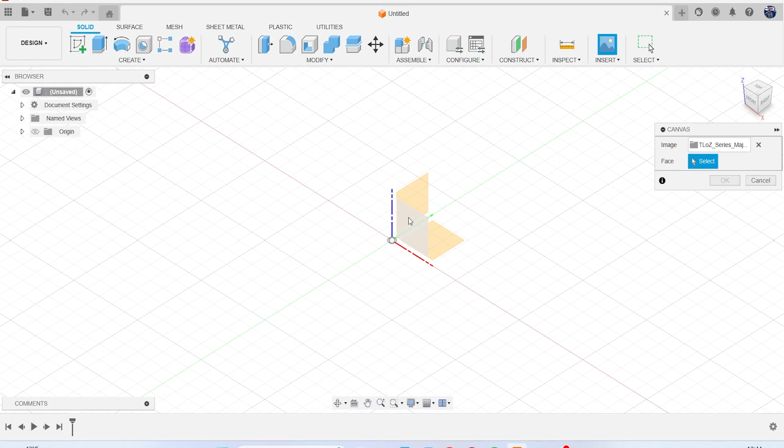I'm going to insert a canvas, go to Insert and Canvas, then bring in my reference image from my desktop folder onto this front plane. I'll make it quite a bit bigger, like 10 times bigger, bring it up, make sure it's centered, and hit OK.

Let's start a sketch and hit L for line, coming from the center straight up. We're going to model half of it and then mirror it across. Then let's go to Arc, 3-point arc. We want to try and keep this as smooth a transition as we can, otherwise it'll look a bit weird when we come to texturing it later.

Let's hit escape to get rid of that, and turn the canvas off for a second. We've got a little bit of drawing there, so we use fillet to smooth that round, and same here, it's a little bit pointy, so we'll fillet it. The rest of it here is pretty smooth, so we won't do a fillet there, we don't need it. Okay, so we've got the general layout.

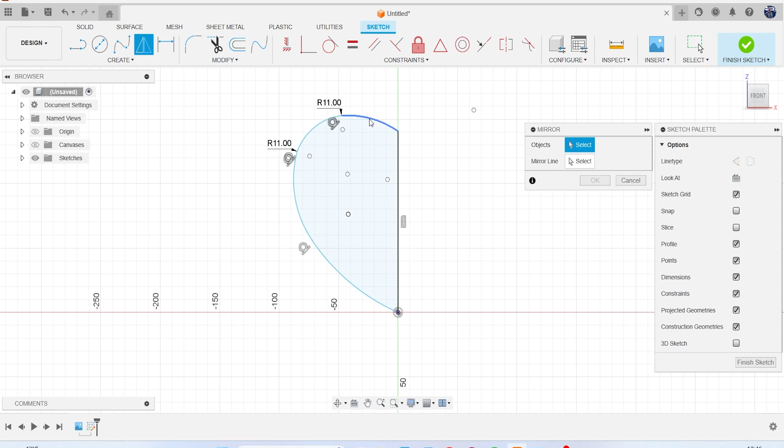Let's mirror that across. To create a mirror, I'm going to double click to select all of those, then deselect that line and select that as the mirror line. So now we've got our general shape of our mask. I'm going to hit finish sketch.

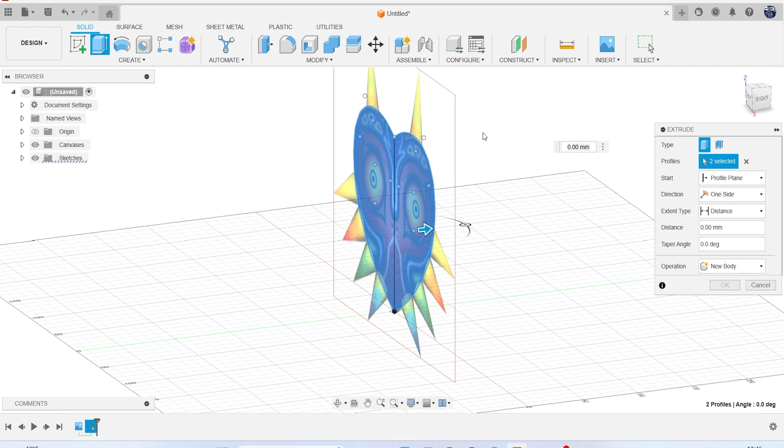You can hit E to extrude, or go to Create and Extrude, keyboard shortcut E. Grab both sides of those. For now I don't know how big it's going to be, but we'll find out later, so I'm just going to drag it out a little bit first, like that.

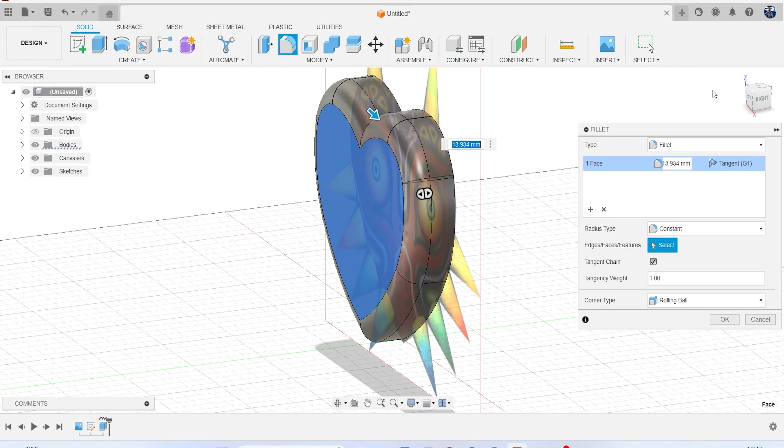So what we want to do is round it off so it's more mask-like. I'm going to go to fillet, modify fillet, or keyboard shortcut F. I'll hit F on my keyboard, grab that surface and just drag it in something like that, then hit OK. Then what we're going to do is flip it over to the side.

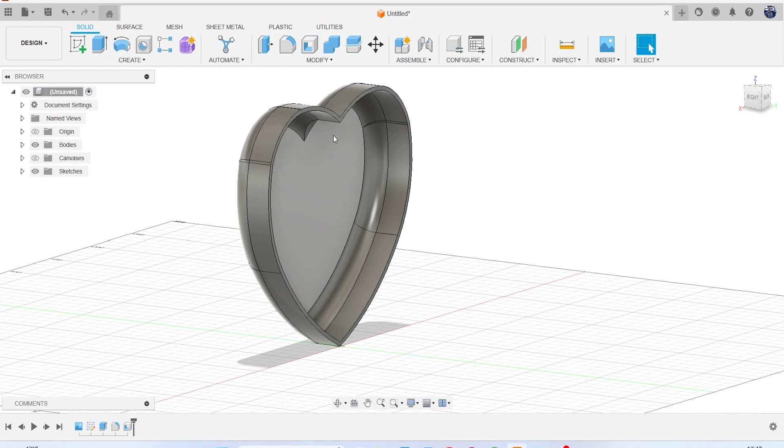Then let's hit shell and drag that in a little bit as well, something like that. We'll alter how thick we make this later when we do the spikes, but for now we're just going to do the details on the actual surface itself, so basically these sort of details.

Again, what we're going to do is mirror it across these. If I turn off the body, see what's going on. So these details here we can all model inside of Fusion, but the stuff that's hand painted, we're actually going to do that in a texturing software afterwards anyway.

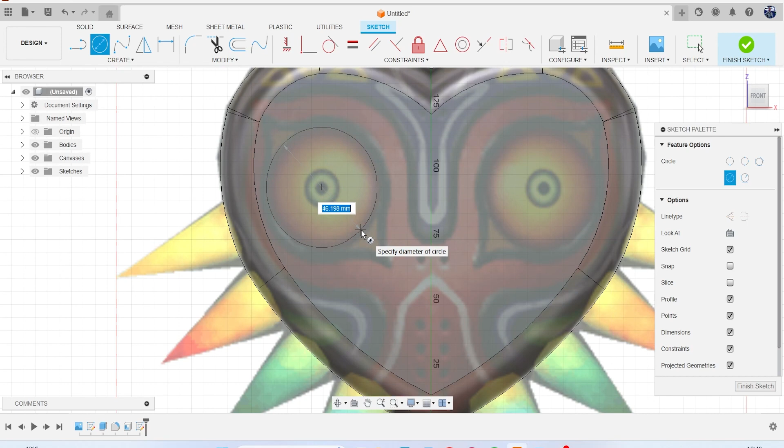So let's create a sketch. First thing, let's create an eye. I'll go to circle, create circle, and I'm going to do center circle, so it'll be a C. I'm going to come in the middle, drag it out like that, and then do another one.

About there. Then I'm going to create arc, 3-point arc. Let's go to the top of there, drag that in, same on this side, like that. Then I'm going to hit T on my keyboard for trim, or it's under Modify and Trim, to cut off those bits, and now I want to fillet to make that a smoother transition again. Let's grab those and enter.

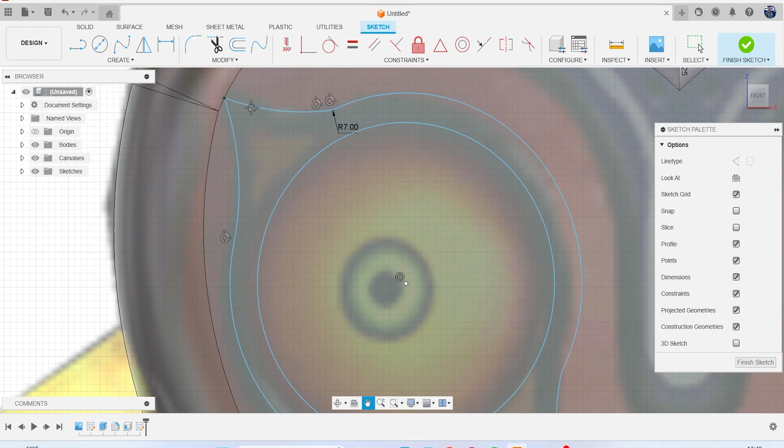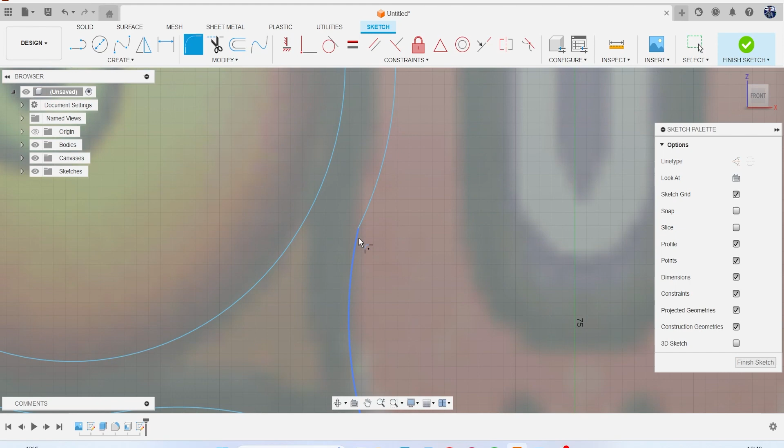This side, yeah, if it's a smooth transition, a lot of the time Fusion will say there's no need, so we're not going to. This one up here, I got 'this fillet can't be created because there was no need.' Whereas this one, it's kind of pointy, so I click on those two. A lot of the time Fusion will try to tell you what it thinks the best case is. You can always alter that if you want, but it normally gives you what it thinks the best one will be.

Okay, so we've got that. Let's finish sketch. So let's grab this and we'll create our eye. I'm going to take this and drag it up.

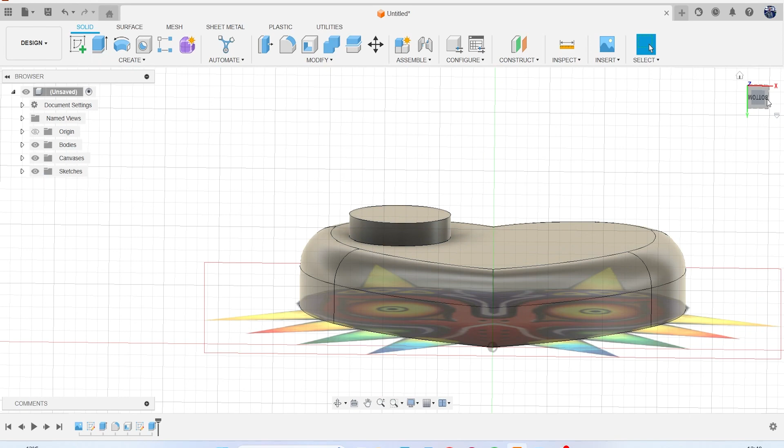I'm going to change this to new body. Then what we're going to do, first of all, is give us a quick save. Let's do that, give it a name, so it's safe.

I'm going to fillet. Again, fillet up here, modify, fillet, or keyboard shortcut F. Grab that surface, let's drag that in so it becomes round like that.

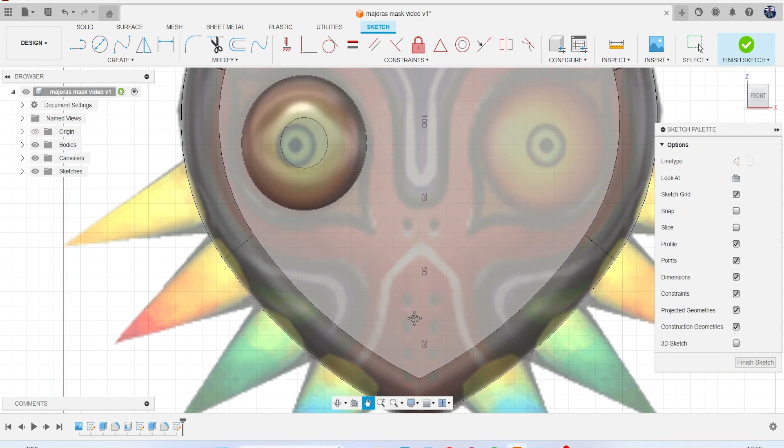Then let's create a sketch. Let's do offset, drag that in. And hit E to extrude, grab that surface, drag down.

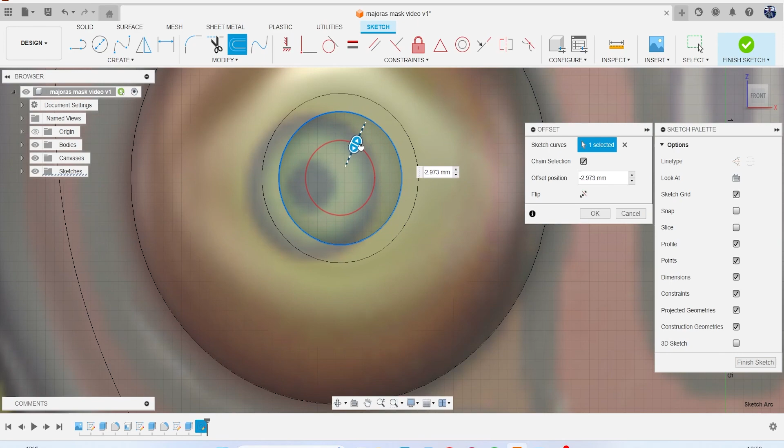Then I'm going to create another sketch. Let's offset that, drag in, and hit E, grab that again, and then we can drag it up again. But I'm not going to drag it up, I'm going to click on this surface here, and I'll bring it up like that. And click join.

And then maybe we'll just do a slight fillet just to round that off a bit, and then we'll do the same. Like that. So we've got our eye.

I'm going to bring back this sketch here. So we want to have this line. So I'm going to create and pipe.

So I'm going to start selecting, and it should select most of it. There we go. I'm going to change this. Oh, in fact, there's one thing I want to do first before I do that as well.

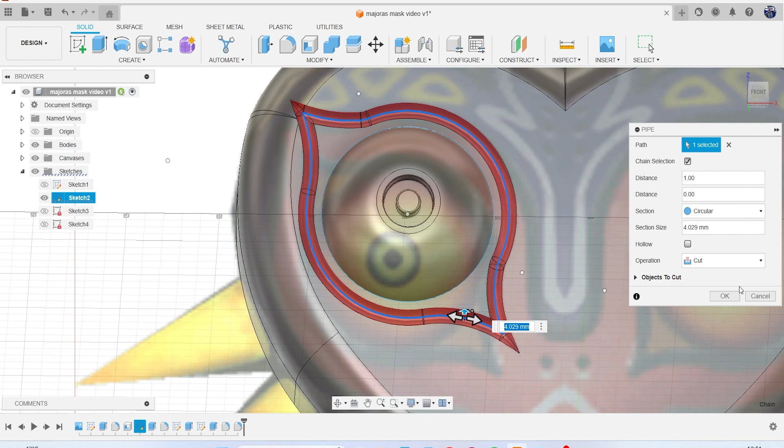So let's go back to this sketch. Let's edit. And we want to fillet those a bit so they're a bit more rounded. Something like that.

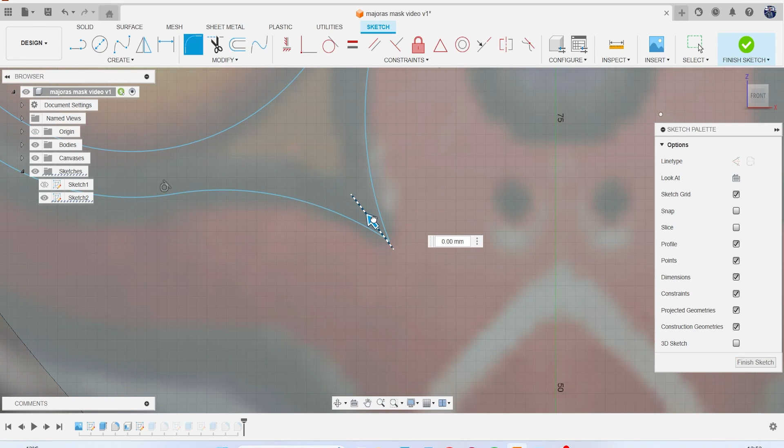Do the same here as well. Let's fillet. Hitting keyboard shortcut F for fillet doesn't work in sketching. So if I was to hit F now, you notice it jumps out of sketching and into solids, which is why you can't use the keyboard shortcut for fillet in sketching, unfortunately.

Okay, now let's go to create and pipe. I'm going to grab all of that. I'm going to change that to new body. And then we're going to bring that smaller.

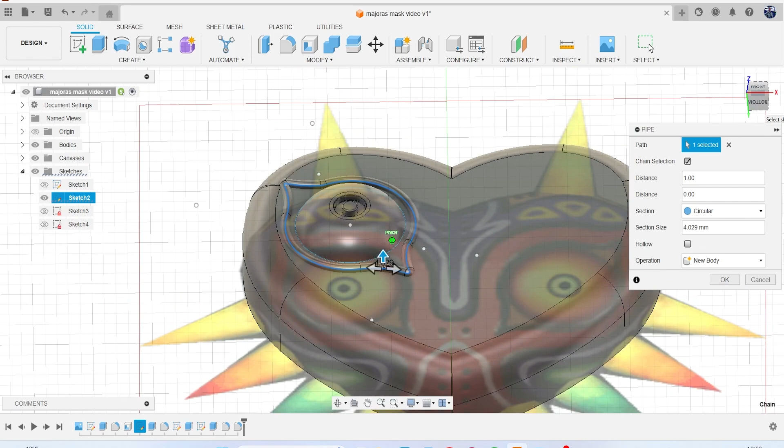Let's try a few different things. Let's try 2. It looks about right, actually. Yeah, okay, we can always change that size later. It's not a big problem.

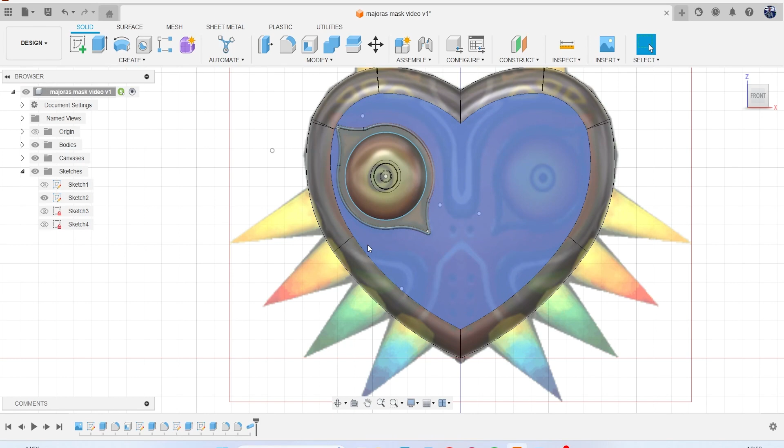So now what we want to do is let's do this big one here. I'm going to turn that sketch off. Let's create a sketch.

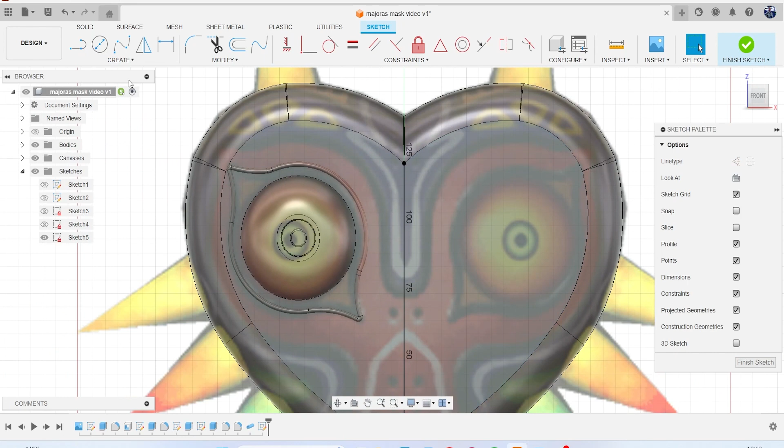And then I'm going to use create an arc, a 3-point arc. In fact, before I do that, let's just do an L for line. I'm going to come straight up the middle. Then I'm going to go back and create my arc.

Just sort of trace over this as much as I can do. Jump between lines, so L for line. And arcs tool.

Turn this body off so we see what's going on a bit better.

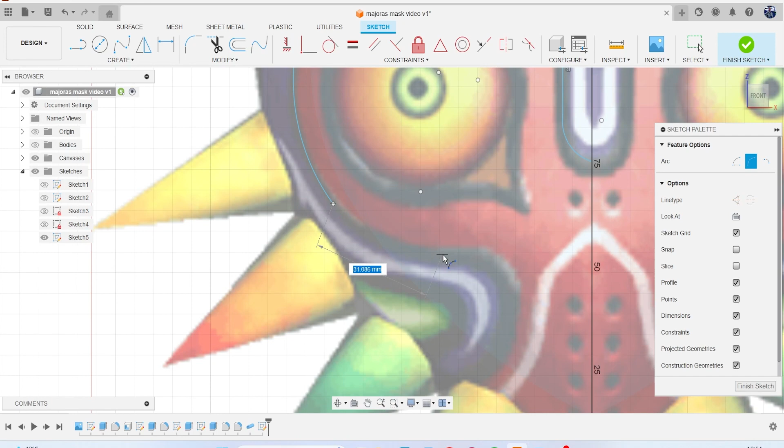Work our way around, nearly done. Again, we will smooth these out in a second, so let's fillet, and hopefully if we click those, it will let us join those together. Enter. And then it's a case of trying to make sure we've got smooth transitions.

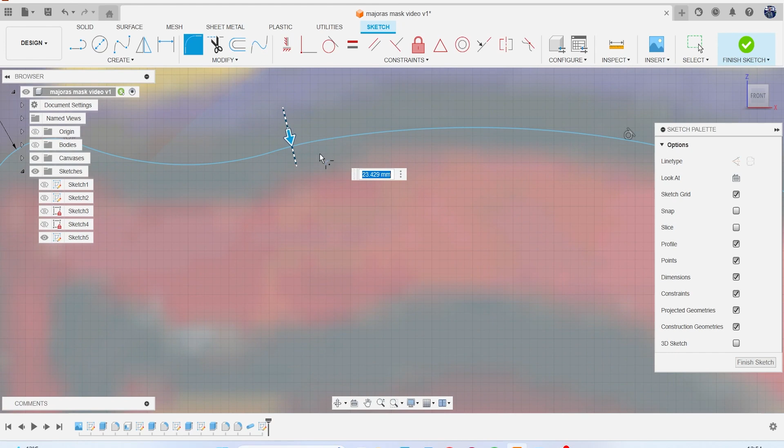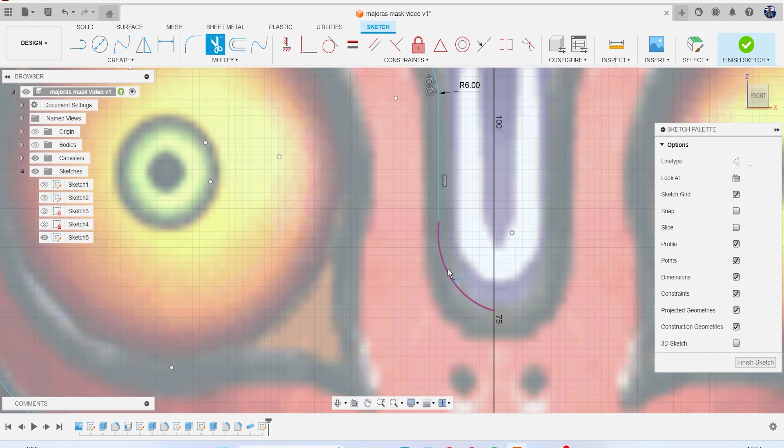We don't want to have one there. But maybe with the numbers, we'll change that in a second. Let's come around here. Here. Oh, I didn't think it was going to do one, but it did. Let's.

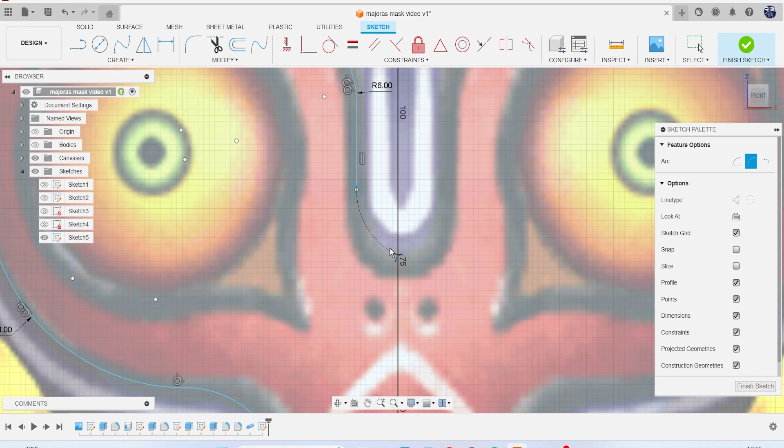Okay. So let's just finish off this one here. Should do, we don't need to fillet there.

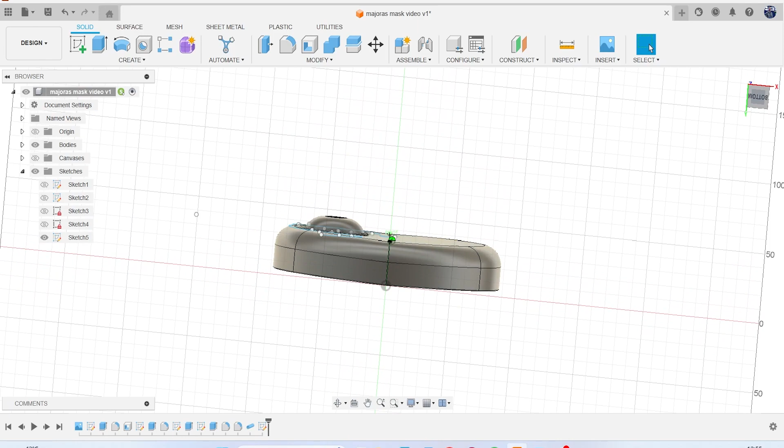Okay. So if I turn body back on and turn the canvases off a second, we want this to be projected onto the surface, but obviously because it's a curved surface, it's not going to be all the way around. So what we can actually do is project it onto those surfaces. So what we're going to do is create another sketch.

So let's create a sketch there, and then what we can do is create, project, and then project to surface. So it says faces, or project, so let's select all these surfaces we want to project it to. And then curves,

double click all those curves there. And then hit OK. You'll see if I turn that sketch off now, that curve has made it all the way across there.

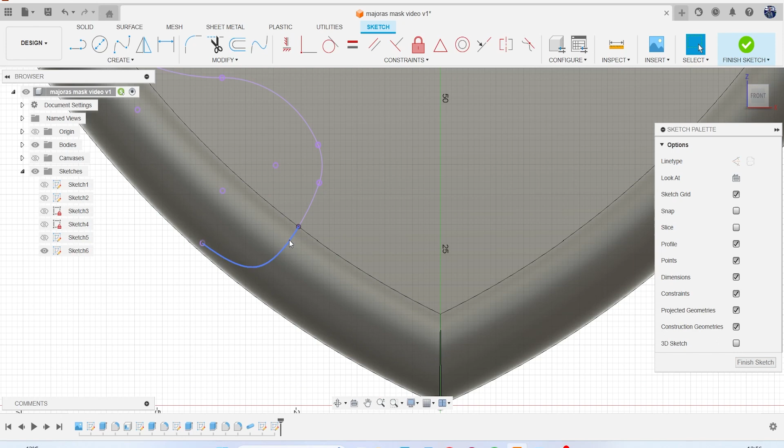Now annoyingly this has gone there, so what we're going to do is I'm going to do it, then I'll split that body along here. But for now, let's just go to create.

In fact, let me just show you. So if I scroll down now, or rotate around, you can see it's actually following the geometry of the shape. So let's go to create, and oh, we need to finish sketch first.

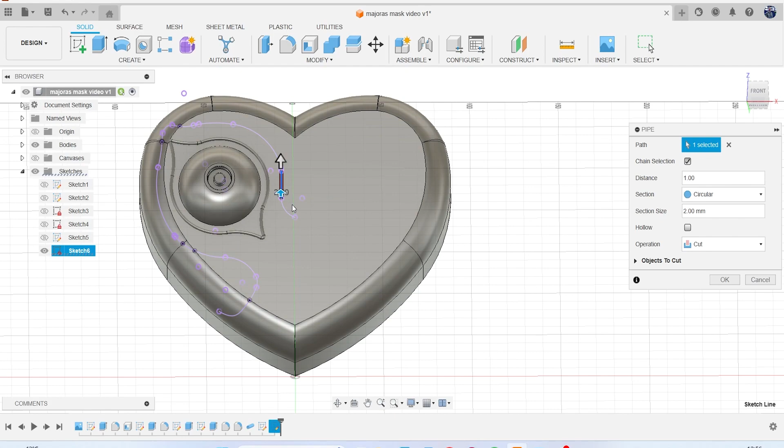Let's finish sketch. Create, pipe, hold down control, work our way around.

I'm going to change this to new body, and it's 2mm like the other one is, but we'll have a look and see how it looks in terms of whether we want to make it thicker or not. Keep working our way around.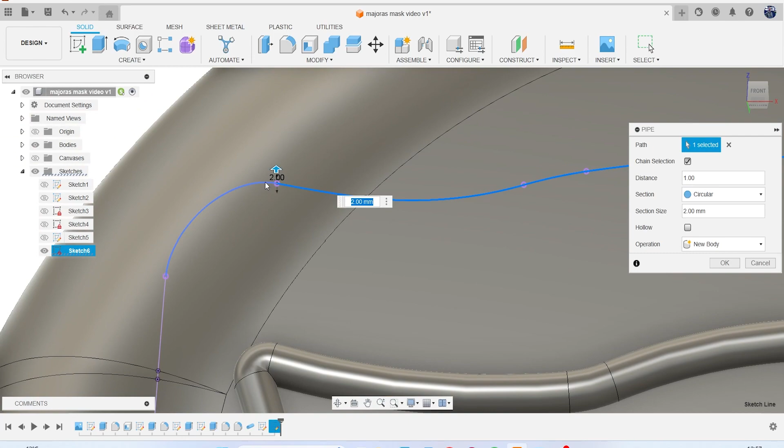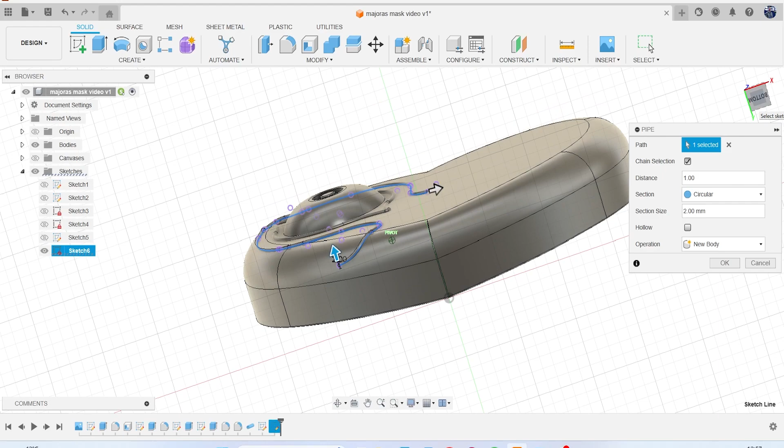Let's have a little look. As I said, we're going to split this one off here and sort of extend it down a bit.

So in fact, one second, let's just go back and edit this sketch here. That's it, L for line. Come straight off there, and then trim that bit off.

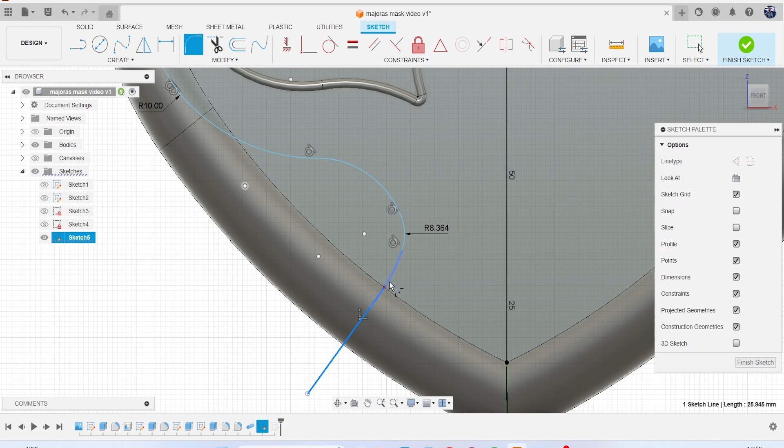Okay, let's now see how that's affected everything. Project to surface. Okay, let's get rid of that.

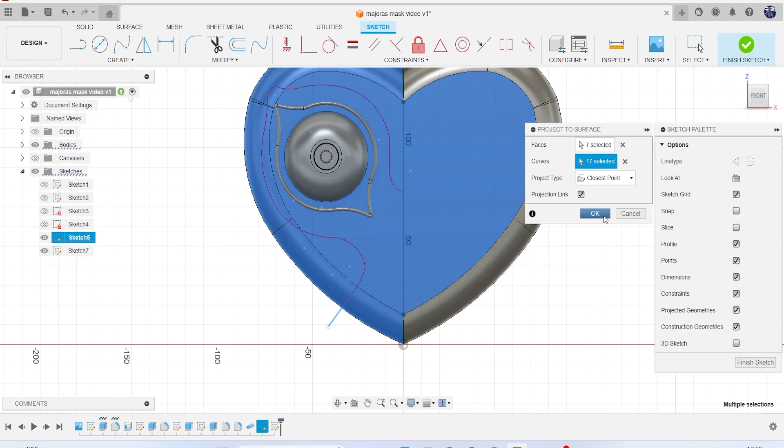Let's do that again. So create a sketch, create and project to surface. Let's then grab these faces. Then let's grab that and hit OK. Turn that off so we can see. There you go, we've got a better result there.

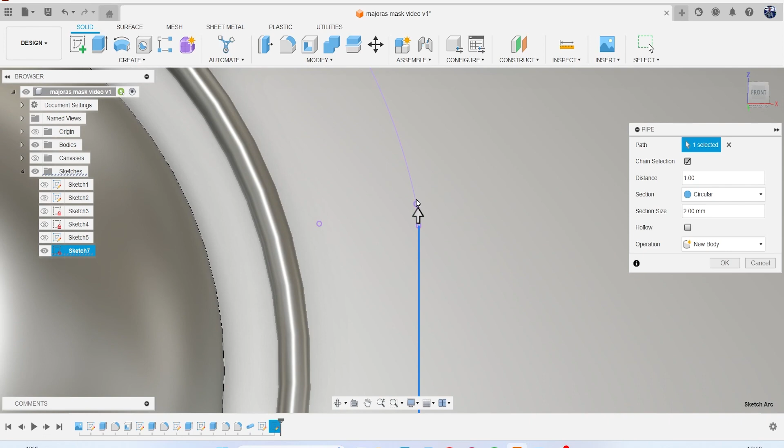Yeah, I'm just going to end where we want it to end. Okay, that's better. Right, now let's go back and do pipe. Change that to new body, and again it's still at 2 for now, which is fine. We'll have a look and see if you want to change that thickness in a little bit.

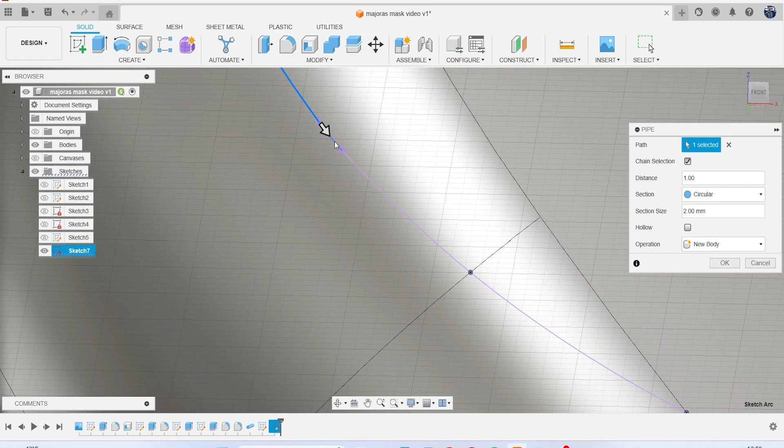So as I'm doing this, I'm holding down control. So if I were to try and click another one now, it wouldn't let me. If I hold down control, grab it, it also won't let me. So if the curve goes there, it won't let me continue if I click on this part. It has to be like one continuous curve basically. So let's just keep going around.

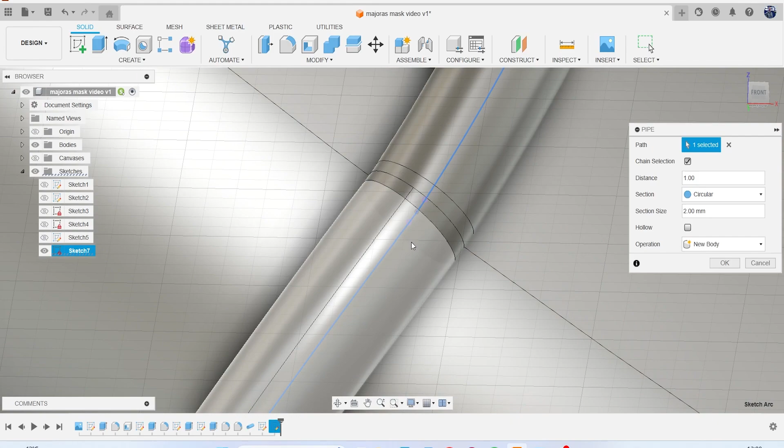There we go. Okay, so I've got that as 2. I kind of feel it needs to be a bit thicker. Let's try 3, 4. I feel like 4 is better. Let's do that.

Yeah, 4 is better. Then let's go and see if we can edit this one. How does it look if we do 4 for that? Okay, there we go.

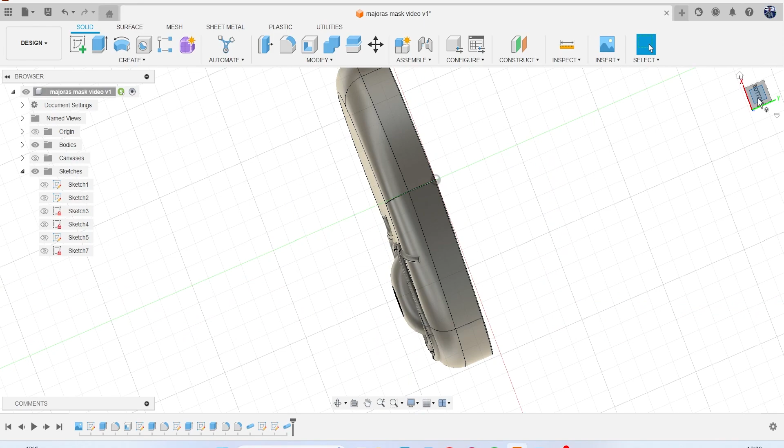In the canvas let's see what we've got going on. We've now got those details. What I'm going to do is let's just fillet around here. So I'm going to go to fillet, grab that and just drag it up just to end it like that.

So now we're going to mirror across. So let's go to the sketch we created there. So we've got this midline here. It's going to go to construct and plane at an angle. Grab that and change it to 90 degrees. So you can see it's here.

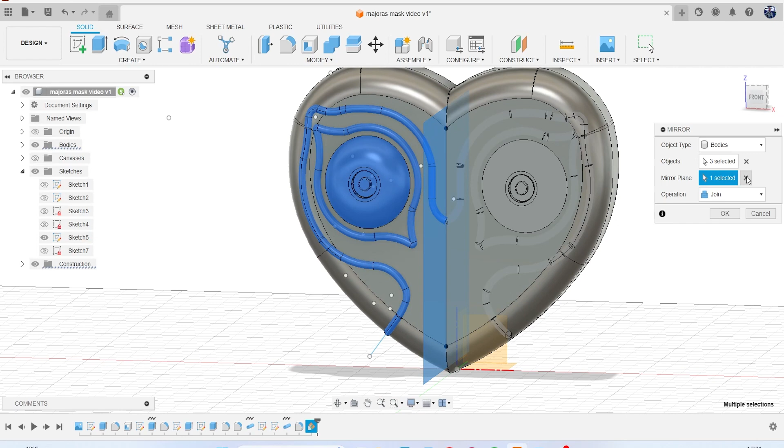Let's go to create mirror, bodies. So I'm going to grab all of these bodies, mirror plane, I'm going to grab this one here. I'm going to leave it as new body first because I'm going to want to join these together in a second. I'm going to hit V for visibility to turn that off.

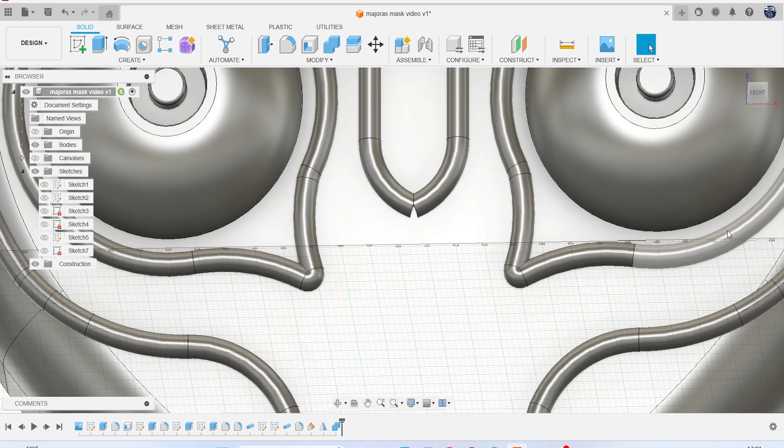You can see it's still following it how we want it to do. Now here we've got a bit of an issue, so what we're going to do is let's combine those two and then let's create loft. Where are you? Loft. Let's loft these two profiles.

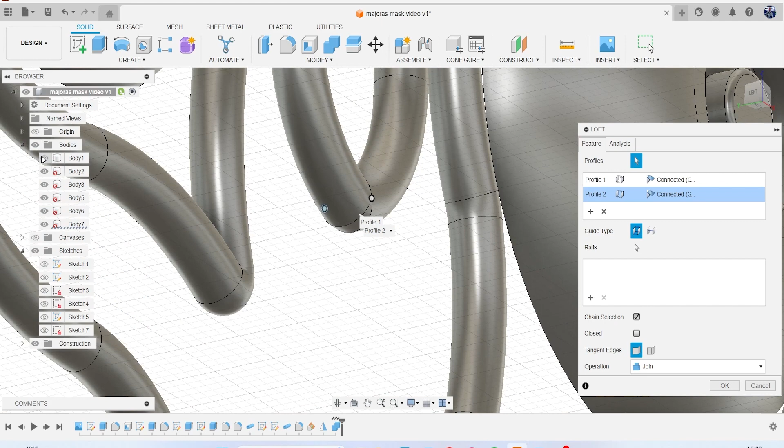Okay, I'm going to turn off that body so they don't join together there. Let's just see how we're looking. Do we maybe need to fillet those, let's see.

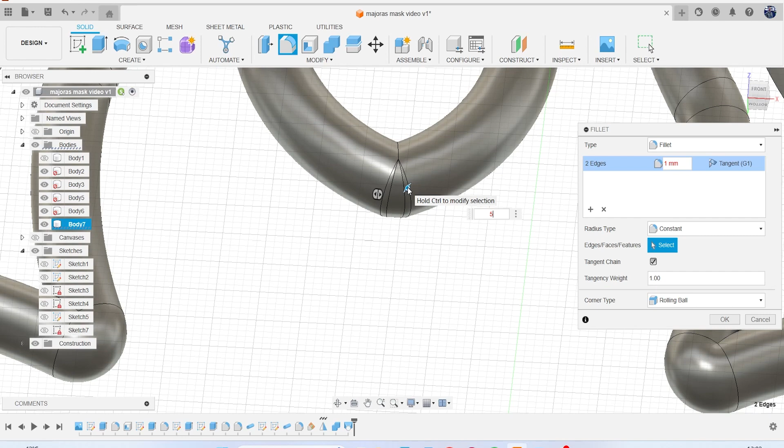See how that's looking. There you go, good. So we've now got most of the modeling side of it done actually, so let's give that a quick little save.

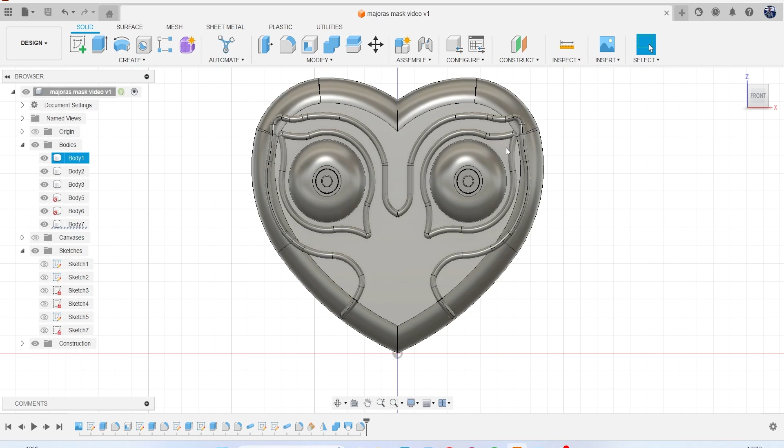Then let's turn on our canvas, so we want to have our spikes. So what we're going to do is go to create and go to cylinder. I'm going to click on this plane here, just to drag it about the same down. I'm trying to match it up down to roughly to here.

And then all I'm going to do for now is let's just drag it so it's taller. And what I can do is hit OK. Take that, right click, move copy.

I'm going to rotate that 90 degrees. OK. Move copy, bring that into position, roughly where I want it. And then I'm just going to grab that, Control C, Control V, bring that one up here for this one.

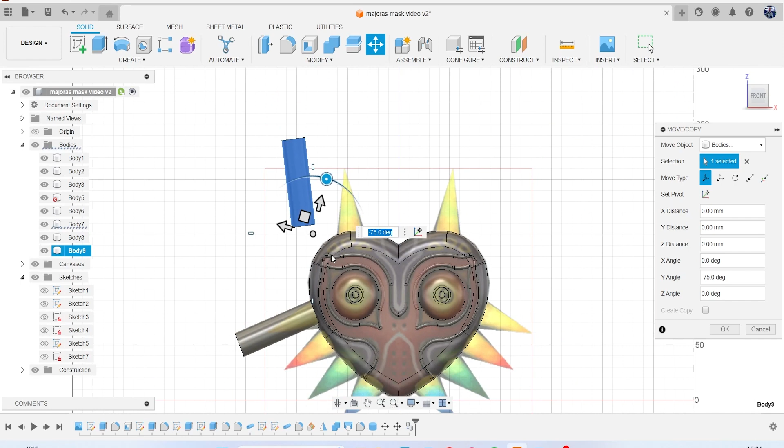Again, we're going to mirror these across, so we're only going to model these 4 and this one up here. So I'm going to leave that there.

Now obviously we want to make it more spike-like, so what we're going to do is go to Modify and Draft. So it says Pull Direction, which is essentially where do you want it to hinge from. So I want it to hinge from this one, faces these. So now if I grab this widget, you see I can make it more or less spiky.

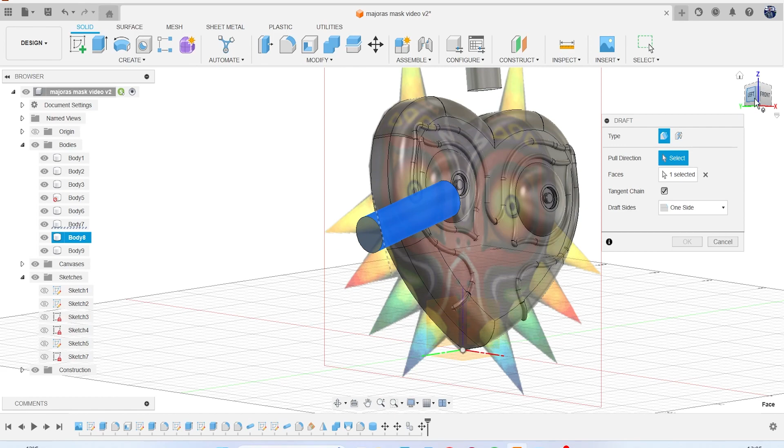So if I had the pull direction as the other bit, essentially it would have inverted spikes, which is not what I want. So I want it to be this side here.

So I want it to be a little bit smaller, I feel. Have I got incremental? No, I don't. Okay. Yep, that looks about right. I'm going to take that, right click, move into position a bit more, rotate.

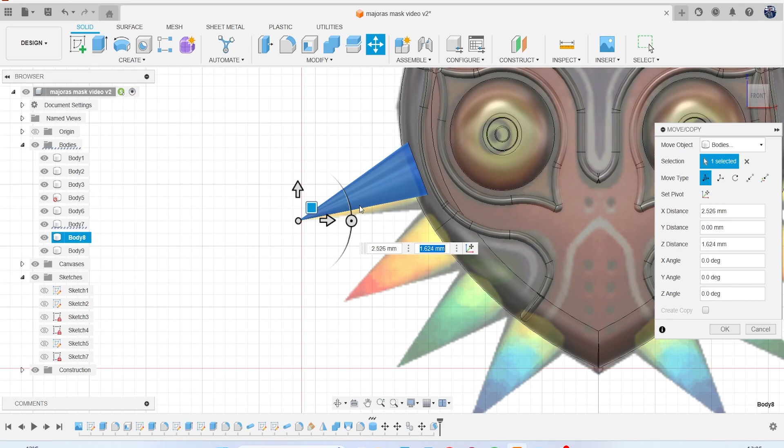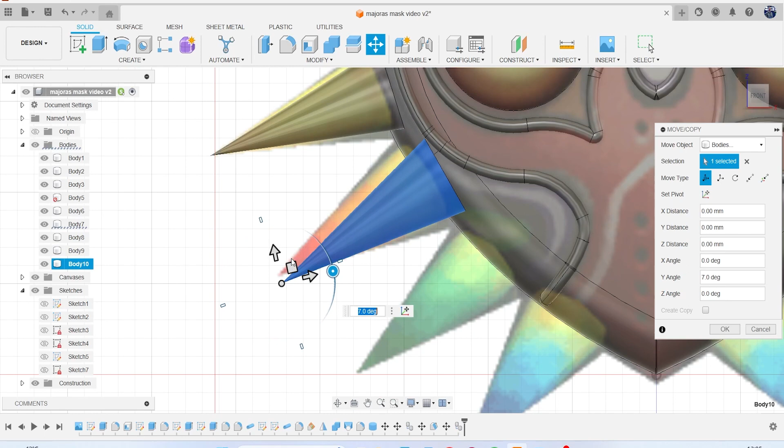There we go, and then I'm going to Control C, Control V, copy and paste these into position. I'm not worried if I'm not matching the reference exactly in terms of the size of these spikes, because obviously the reference image is quite blurred as it is anyway.

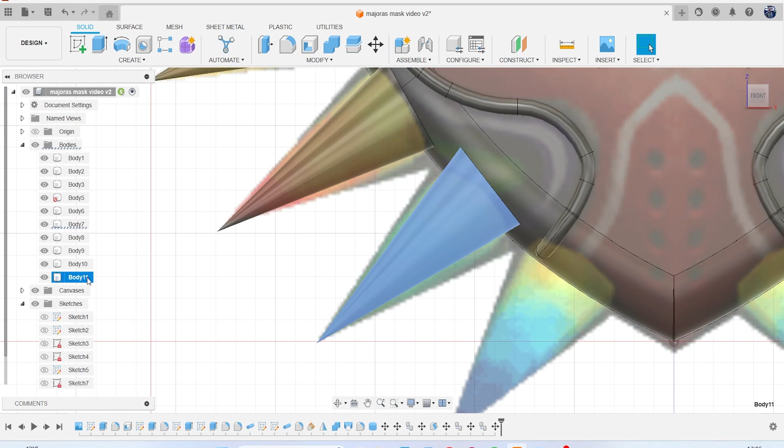Not a massive deal, as long as I've got it close to where I want it. Control C, Control V, like that, and we'll do the same here. So let's go to modify, draft. Pull direction is going to be there, pull faces is going to be there.

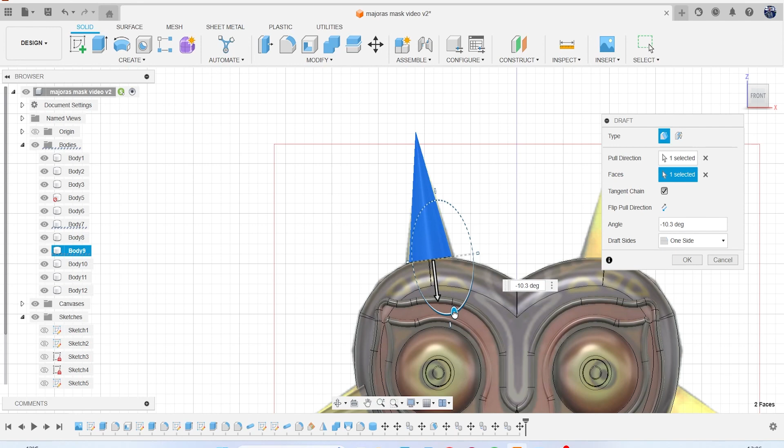Well, these are taller spikes. Not quite that tall though. Something, let's do that. That's pretty much in position we want it. Now, obviously, if I rotate around, it's nowhere near where we want it to be. Let's just turn canvas off.

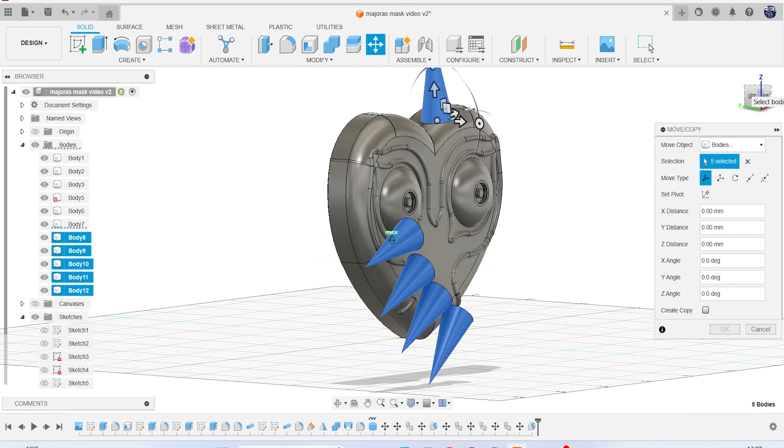Let's move copy, bodies, let's grab all of these. Then all we need to do is take these, move into position. Like that.

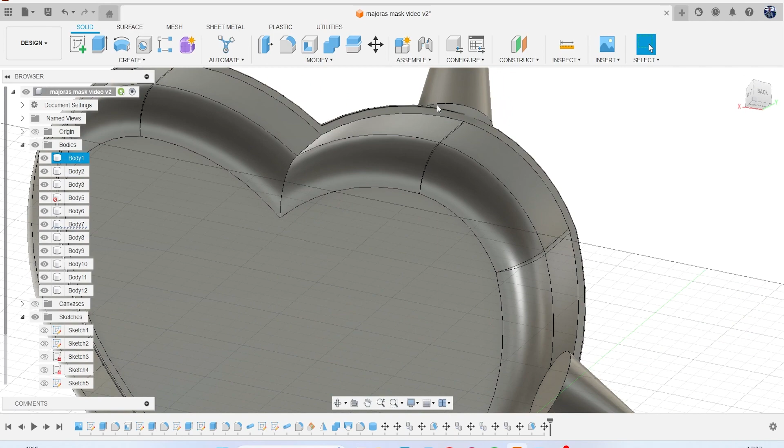This is why we didn't know how thick we want to make the body, because obviously we want to make it so the spikes fit. Now all I'm going to check for at the minute is I want to make sure they're intersecting, so I'm going to go to press pull, grab faces and just drag them in. Okay, so that they are all intersecting. I'm just going to do a little bit extra just to make super sure.

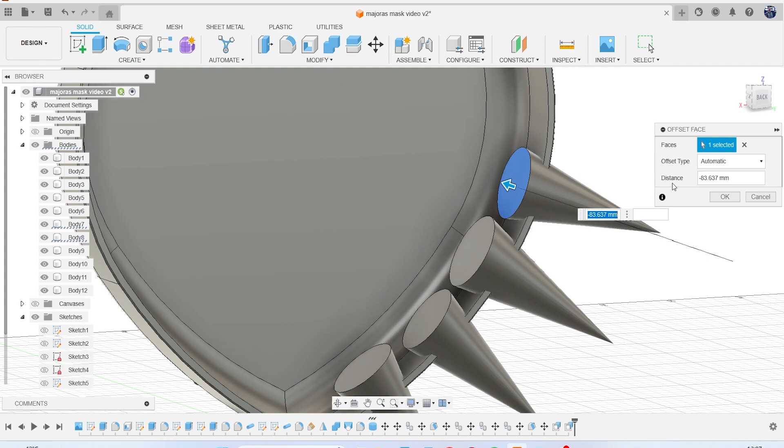There we go. And then what I'm going to do is let's press pull, grab that surface, and drag, just so we make sure that we've got our spikes covered. And then hit OK.

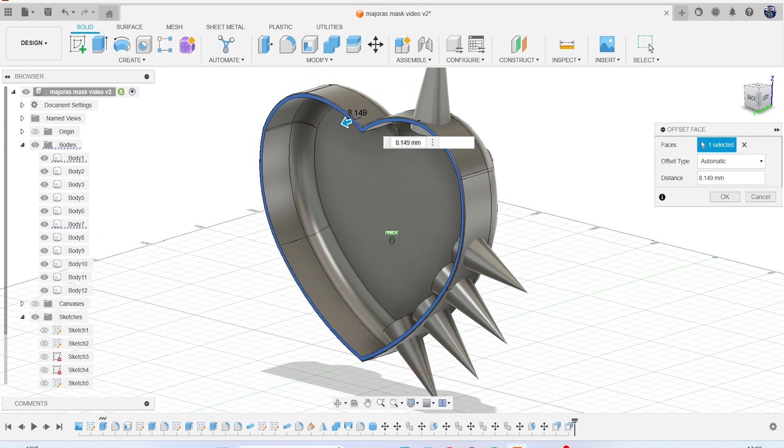So now we want to split those spikes, we haven't got those intersections, so we're going to go to combine, target body, that's like that, tool body, we'll select that, and hit keep. Otherwise, if we didn't, it would end up - so we're going to set it to cut and go to keep tool, hit OK. So you see that spike there, click on this one, rotate around.

Click on this one here, it lets me. There we go, here. So I can remove that one. So I'm going to right click and remove.

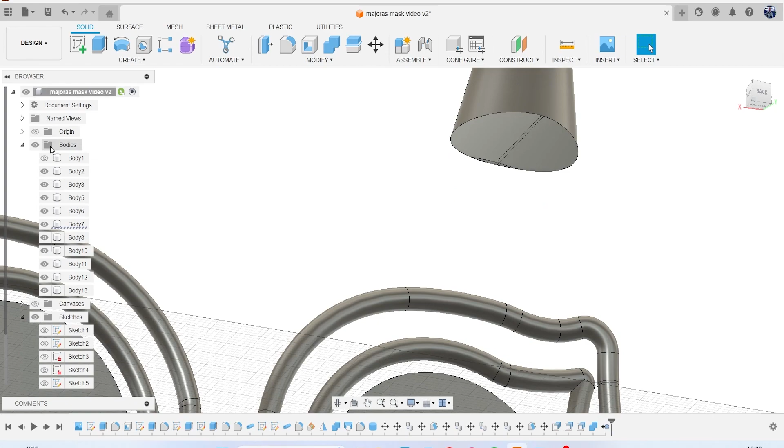Get in the habit of removing rather than deleting, because then if you reference something further down in the past, you end up getting loads and loads of errors. So I'm going to just do that for all of these.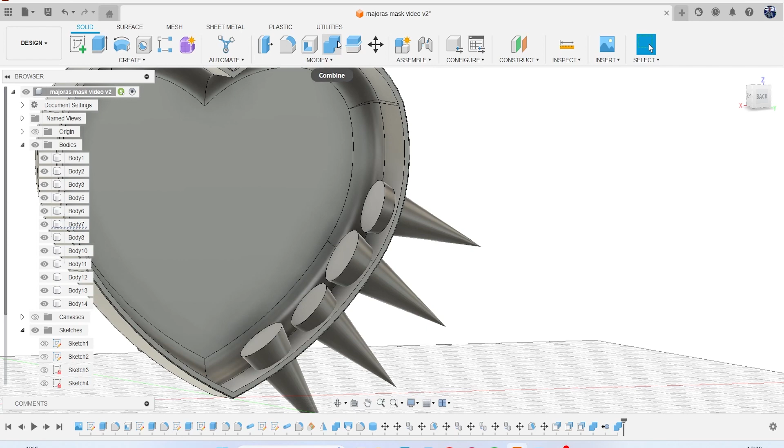So target body, tool body, that. So set to cut and keep tool. If I don't keep the tool, by the way, it'll end up deleting my mask, which I don't want. So I'm going to click OK, just going to do the same for all of these. It should always remember the last setup you did, so it'll always remember cut, it'll always remember keep tool, unless you change it again.

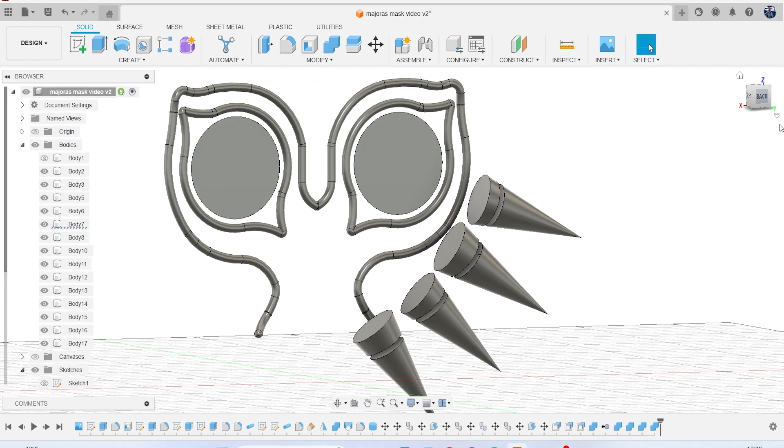Okay, so now I can just turn off the mask, and you can see they're cut anyway. But let's just grab those, right click, remove, right click, remove, right click, remove, grab that, right click, remove.

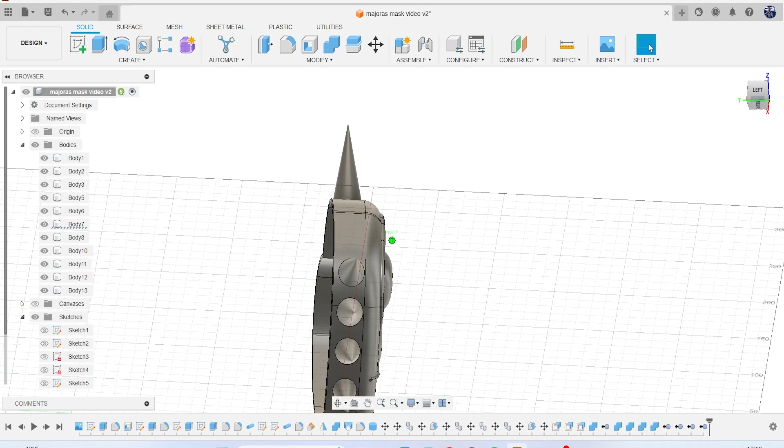So now if I turn the mask on, you see that they intersect. Well, they don't intersect, they match up perfectly. So I'm going to mirror all of that across.

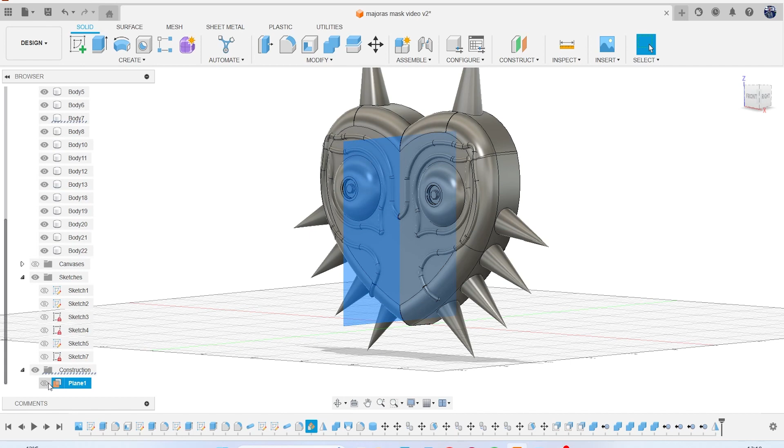So we've already got our mirror plane set up, which is this one here. So let's go to create mirror, bodies, let's grab those, mirror plane, select, and grab that one. Select as new body, hit OK, and then click on that. And again, you can either turn off with the eyeball, or an easier way is click that and hit V for visibility, and it disappears as well.

So we've got most of that done. Let's just fillet these edges slightly, just to round it off. Now, as I said, if you look at the canvas, I'm going to give us a quick save as well, just to make sure.

If you turn on the canvas and turn the bodies off, as I said, the colours and all this sort of thing, those we're going to end up texturing when we actually paint it when we texture it. But things like these holes and things like that we can do in here as well. These ones we'll do in the texturing software as well. So let's just turn back on body, right sketch.

I'm just going to do a line down the middle there. I'm going to hit C for circle, drag out, because I want them all to be the same size. I'm going to just grab that, Control C, Control V, copy and paste, bring it down.

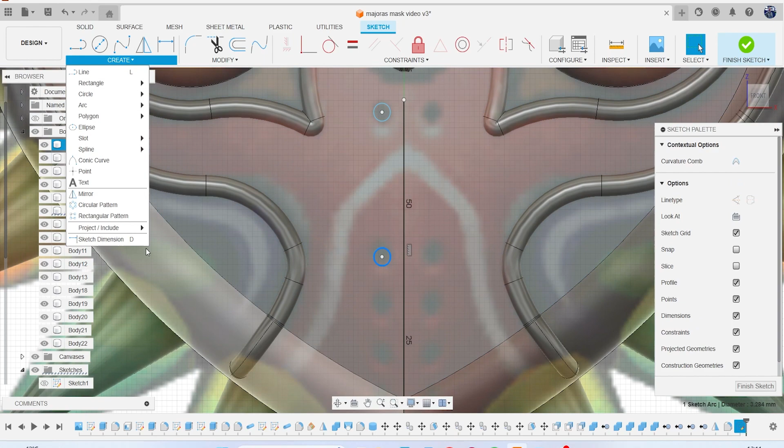Then I'm going to grab that and create a rectangular pattern. And then we want 4 of those. Okay, then let's hit E to extrude. Grab those 4.

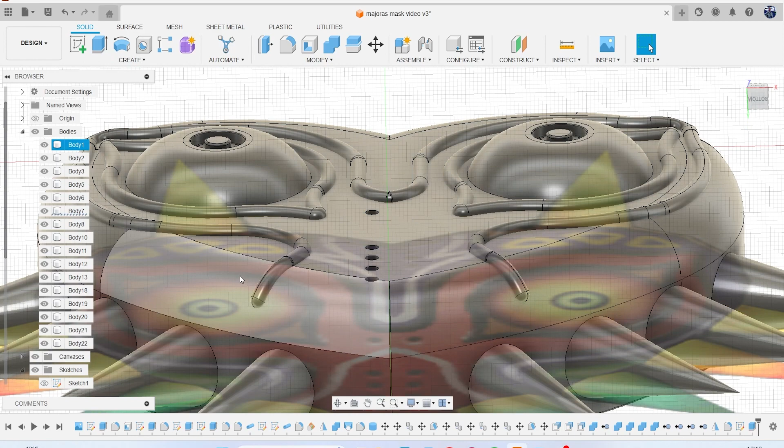Just rotate so we can see what's going on. Just drag them in, like that. Turn off our canvas. I'm going to do a small chamfer, I feel. Let's try back 0.5 so that looks right.

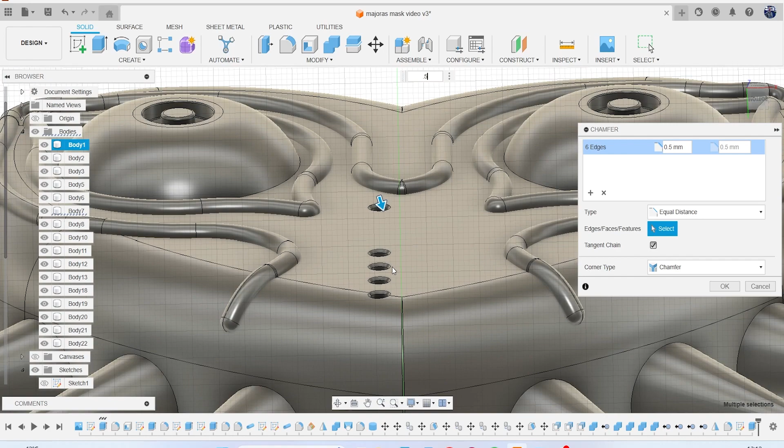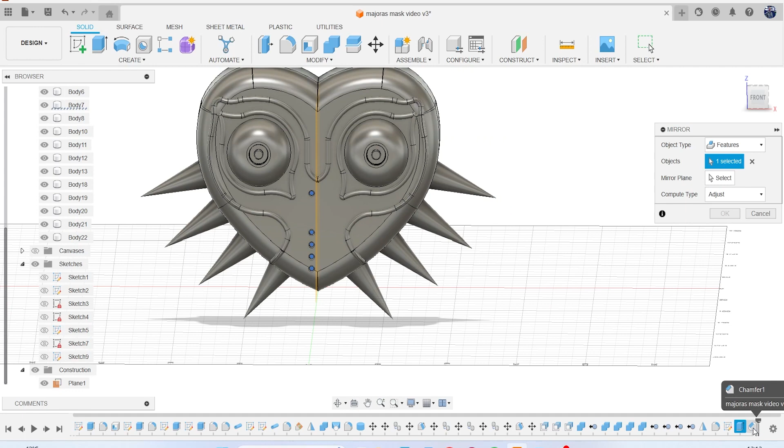Okay, then let's mirror those across as well. So create mirror, turn on that mirror plane again, and this time I'm going to change that to features. Let's grab the extrude and the chamfer, then let's grab that mirror plane. Okay, again, let's turn that off.

So in terms of the modeling side of things, we are done. I'm going to give that a quick save.

Now, as it stands, as far as I've tried, Fusion's texturing isn't really at the stage where I'd be able to do this particularly well. So what I am going to do—obviously in a lot of these videos I've used different texturing software, so I've played with Substance Painter, Marmoset and things like that. I have also recently got hold of 3D Coat Textura, which I'm going to use for this part because it's perfect for this type of thing and it works really well with Fusion anyway.

But what you do need to do is add some better prep work. So what I'm going to do is just add some materials, just so essentially it's easier to apply materials to it for real life when I do it in the software as well. You don't need to make it look as realistic as it needs to be. So all I'm going to do is just take some materials. I am going to somewhat get them close, but that's just because I want to, more than anything.

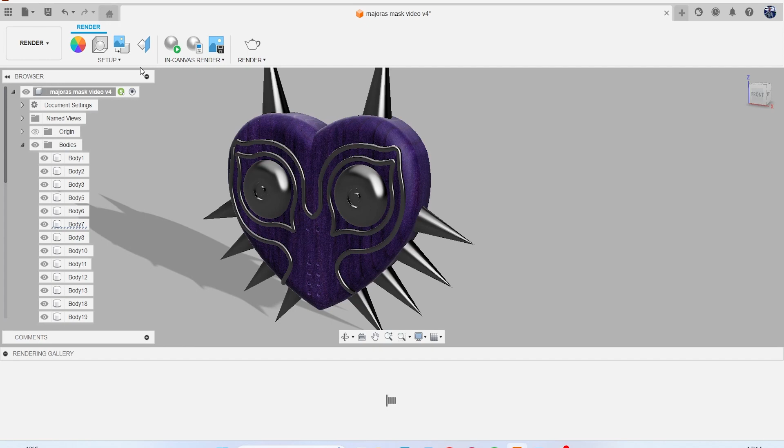Drag that on there and change the color of that, so it should be like a purpley sort of color. So let's grab that. I'm going to make it like a dark purpley sort of color... more bluey than purple, but oh well.

There we go. And then what else do we want? So we want these to be black. So let's do like a... in fact, do that, make it not shiny, so make it more matte-like. So replace those and then change the base.

And the only reason we're doing this now is you don't need to do this when you take it over to texture, but it just means it's really, really easy to apply it to specific faces and bodies when you're done.

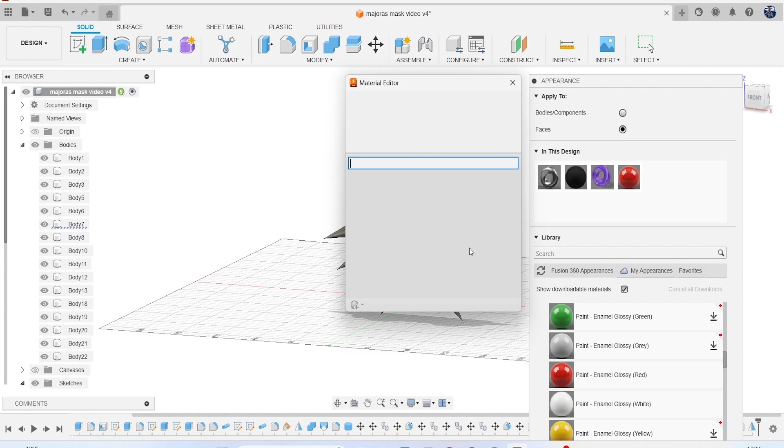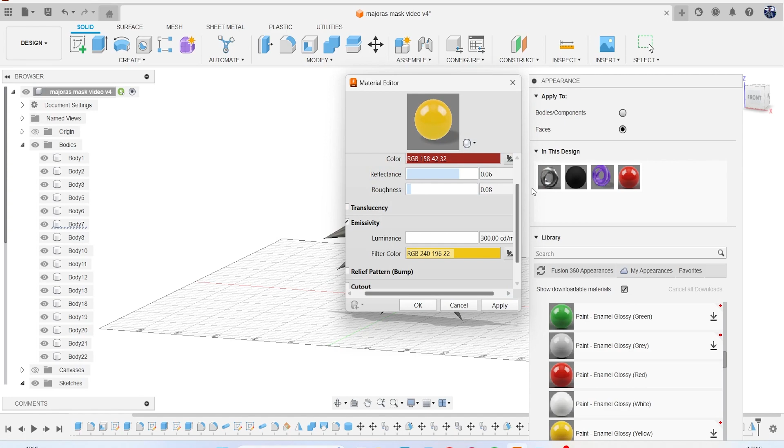Okay, and then let's do the eyes as well. So we'll do like a... make this emissive a little bit. And again, just simply because... just do the spikes.

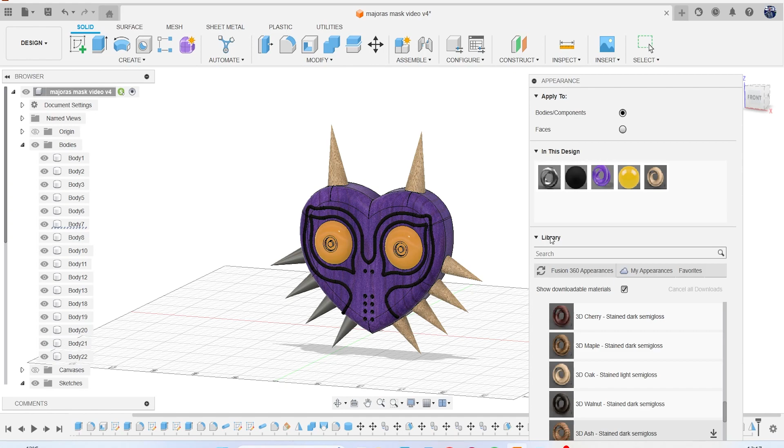Okay, so that's pretty much the prep work done for taking that over to Textura. So I'll look at render, but again, not really relevant to how it's going to look, since we're going to take it over and texture it properly in a second. But we've just added those material IDs just so when we texture it later, it's a lot easier to just apply the material straight onto it.

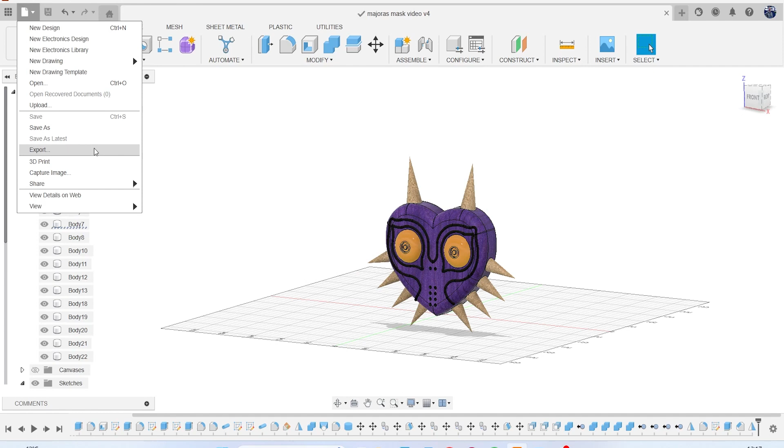Last thing to do then is just give that a save, go to File, Export. I'll put that onto my desktop. Then what you can do is either OBJ or FBX. I'm going to do it in OBJ. FBX and OBJ will both work, it's absolutely fine, but I'm going to do OBJ, hit export.

And what we're going to do then is jump over to 3D Coat Textura to have a go at texturing it. Okay, so now that we're in 3D Coat, what we're going to do is go ahead to Paint UV Mapped Mesh, and we click on this button here, then we can bring in our model. So this is our Majora's Mask.

So if you have used any 3D modeling software like Maya or Blender, you might know a little bit about UV unwrapping. It's not something you have to do inside of Fusion, but essentially it's how you make your material applied to the actual model itself. If you imagine a 3D object being kind of flattened down into a 2D shape—essentially like a tissue box or a cereal box.

Obviously it's a cube, but if you were to flatten it down into a 2D net, it's that sort of theory. Now normally if I was going to go from Fusion into Substance Painter or Marmoset, I'd have taken it into Maya, unwrapped it and done it that way, but 3D Coat will let it do that for you.

So come here and make sure you've got auto mapping selected, and make sure as well you've got Z up coordinate system ticked. Normally that won't be ticked, so make sure you've got that ticked. Then down at the bottom, treat materials as separate textures. This is why when we were in Fusion I applied those other materials to it, just so it's easy to separate everything. If you've already got material selected, it will have that ticked off. If you left it blank, it'll be unticked. So that's all we've done so far - just make sure auto mapping is on, that should be automatic anyway, Z up ticked, and then treat materials as separate textures.